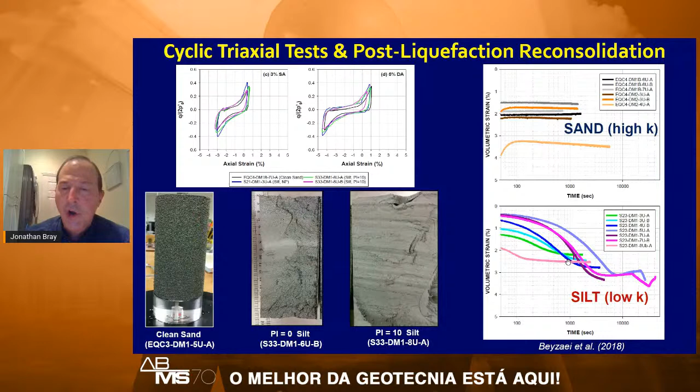What is often critical is beyond the stress strain response in the laboratory test, you look at the water and how water moves in the soil. Sands reconsolidate very quickly and the volumetric strain essentially appears instantaneously. Silts actually have a slower response, and you can also see the layering even at the element level.

So when you start thinking about post-liquefaction residual strength, I see that as a system property, such as the famous back analysis of the lower San Fernando Dam, where it is the layering, not just the element response, but also the movement of water and void redistribution that combine to lead to a back calculated post-liquefaction residual strength. It's my opinion that you should rely primarily on these back calculated post-liquefaction residual strengths based on field case histories, captured by things such as the cone penetration test, and consider the laboratory tests interpreted within the context of understanding their limitations and thinking about things such as layering effects that may change the element response to the system response.

One of the issues is post-severe strength loss like liquefaction: static slope stability analysis to understand, either seismically or statically, if the soil is likely to trigger liquefaction, and what are the consequences - the post-liquefaction static slope stability analysis.

Although advanced analysis should be performed, before you perform those advanced analyses, I think it is useful to gain insights from limit equilibrium analysis. They can provide valid insights, giving you a sense of the performance and a sense of the answer before you do the more sophisticated analysis. In some cases where things are fairly straightforward, they can be used as a screening analysis.

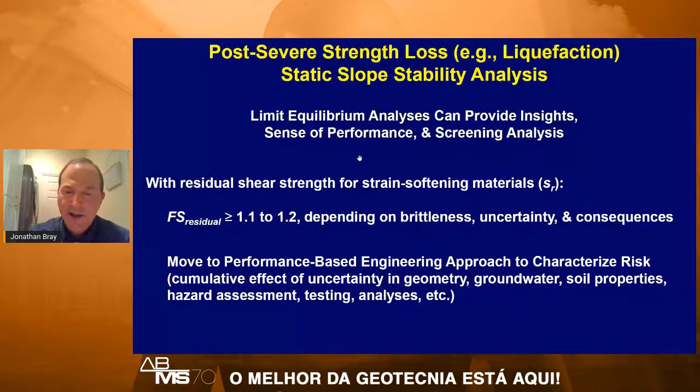Talking about pseudostatic slope stability analysis, it is not possible to capture the sophisticated, complex response of a system to a ground motion with a single parameter, a seismic coefficient. So one has to think about this as a calibrated approach that is just providing that initial insight. The seismic coefficient represents the seismic loading, the strengths are captured, and the factor of safety - we have to talk about all three of those together.

A selection of an acceptable combination of the seismic coefficient, the strengths, and the factor of safety has to be required through back analysis of field case histories to get consistent performance, or when those are lacking, consistency with more advanced analysis. The idea that a factor of safety of 1.1 is safe is not appropriate - it depends on the seismic coefficient, the strengths, and how the analysis is performed.

Given the importance of the seismic coefficient, it should be characterized carefully. It clearly depends on the earthquake shaking - the intensity, frequency content, and duration - and it depends on the dynamic response of the actual tailings storage facility. But it should also depend on how critical the structure is, and really that leads to what's the acceptable level of seismic performance, which we typically look at in terms of allowable displacement if we're going to have limited displacement.

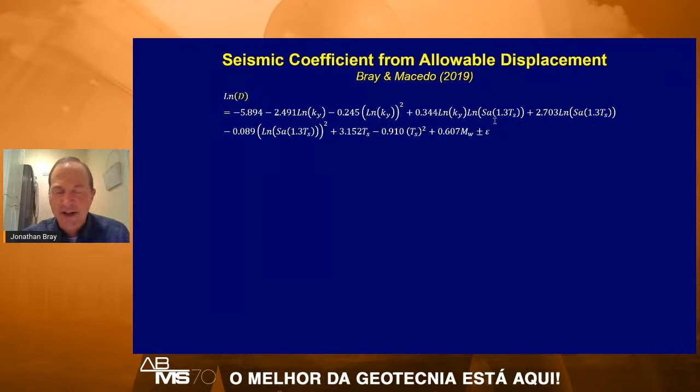The work I did with Jorge Macedo, building on the work with Thaleia Travasarou, developed a method for estimating seismic displacement as a function of things like the yield coefficient, the dynamic loading, the spectral acceleration at the degraded period of the system, and such. That can be inverted so you get a displacement-allowed, calibrated seismic coefficient that gives consistent performance with what you'd get from a seismic displacement analysis. It also includes seismic loading considerations and, importantly, uncertainty.

Let's look at an example: a seismic coefficient for a magnitude 7 earthquake. I'm calculating the seismic coefficient for different spectral accelerations based on the loading. If I pick a displacement of 15 centimeters, you can see as the loading increases, the seismic coefficient increases. Let's pick one ground motion level, a spectral acceleration of 1G at the degraded period of the site, for a system with a period of 0.3 seconds, magnitude 7.

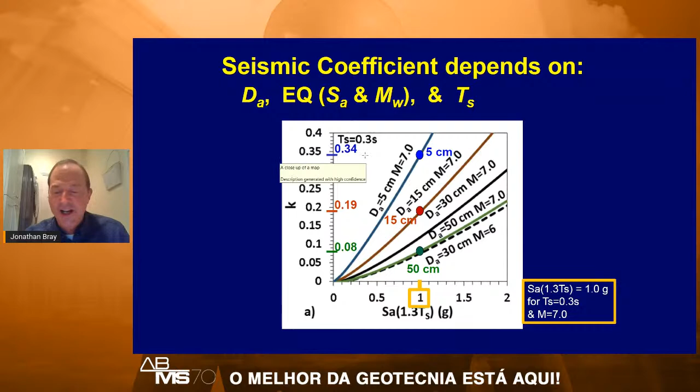Depending on what you consider allowable performance—whether it's 50 centimeters, 15 centimeters, or 5 centimeters in this example—you get a different seismic coefficient. So the seismic coefficient doesn't just depend on the intensity of ground shaking, the duration, or the magnitude; it depends on the allowable level of displacement. If it's 50 centimeters, the coefficient can be relatively low, like 0.08. If you have very stringent criteria like 5 centimeters, the seismic coefficient would be 0.34.

In conclusion, this method should only be used in non-flow cases. A static post-liquefaction factor of safety has to be greater than 1.0. You should use strain-compatible post-shaking strengths. The important thing is selecting an allowable level of shear displacement and capturing the uncertainty you want.

Capture the dynamic loading, then select that seismic coefficient—not arbitrarily, but based on the ground motion and, very importantly, the level of displacement you consider acceptable—and calculate a factor of safety greater than 1. That's essentially consistent with calculating the right displacement less than that value. Remember that Newmark analysis captures shear, so you have to add in the volumetric-induced displacement to get the total displacement.

Another approach, not much more complicated, is instead of using a calibrated seismic coefficient, to just use a seismic displacement analysis, or move toward performance-based probabilistic analysis, where you capture the uncertainty in the ground motion and the uncertainty in the dynamic response of the tailings storage facility. A paper such as Macedo et al. 2018 provides some insight on that. Thank you.

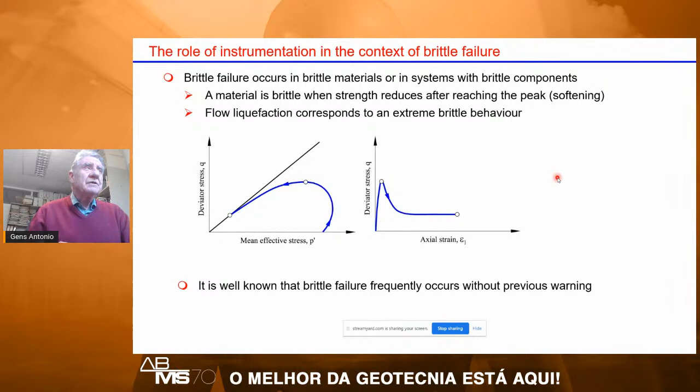In fact, there was liquefaction of the tailings behind it, but this liquefaction was after, as a consequence of the failure. It was important because it provided the extra thrust to move this dam something like 60 meters downstream, opening the breach and allowing the tailings to flow out.

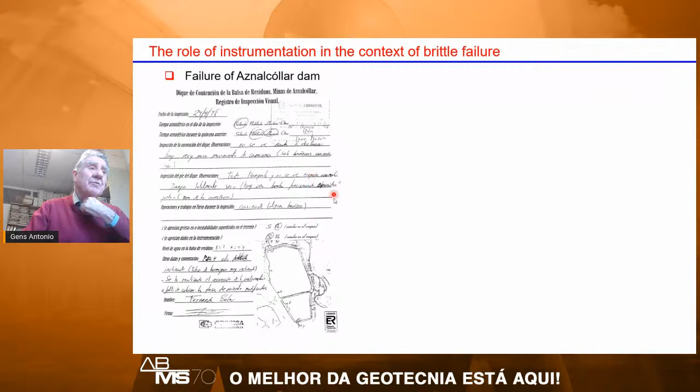This dam was actually closely watched. Every 2 weeks there was an inspection. Somebody went there and filled this form. If I translate it, it says nothing noticeable, all quiet, no cracks. The interesting thing is that the date was the day before the failure. In fact, a few hours before the failure, because it was in the afternoon and the failure took place at 3 in the morning. So no warning whatsoever.

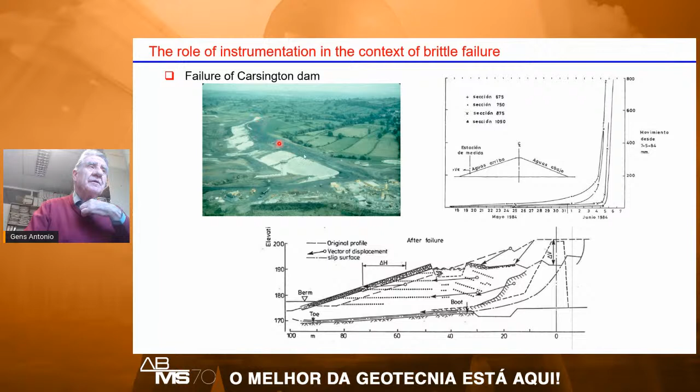The second case is a well-known case, Carsington Dam, a water dam which was near reaching end of construction. It fell about 600 meters long. It failed through the core and through the clay in the foundation, the yellow clay, and it was also instrumented. These are measurements of the horizontal displacements at the toe, and you can see there is a very sharp increase associated with the failure. There was very little warning, perhaps 24 hours, but it was a weekend, too late to do anything.

And in the case of flow liquefaction, which is a kind of ultimate brittle failure, we have the case of Brumadinho, where there was failure with no apparent precursors. I'm not going to talk about Brumadinho because later on Professor David Williams is going to go back to this case, but I wanted to bring this picture.

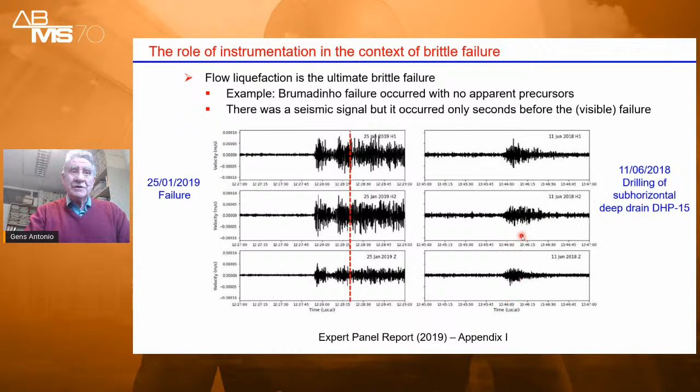I bring this here because 6 months before, there was a very similar event, very different from the blasting ones, associated with the drilling of a sub-horizontal deep drain. We have reasons to believe that this drilling actually set off a kind of contained liquefaction that didn't propagate to full failure. So having records like that, can it perhaps give an indication that you have a part of the dam which is very close to liquefaction? Obviously, if this is going to be associated to the failure, then it will not be of any use at all. So my opinion is that there is actually little chance of a monitoring system giving adequate warning of impending flow liquefaction failure, even if we resort to quite advanced technologies.

Instead, we should focus on trying to identify whether we have liquefiable materials in our system. For liquefiable materials, we need two conditions. The first is that the material should be saturated or close to saturation. Sometimes a figure of 85%, 90% is put as a threshold over which there is liquefaction, although the empirical basis for that is rather scarce. And also the material should be brittle - not all contractive materials are brittle, so we should try to identify when they are.

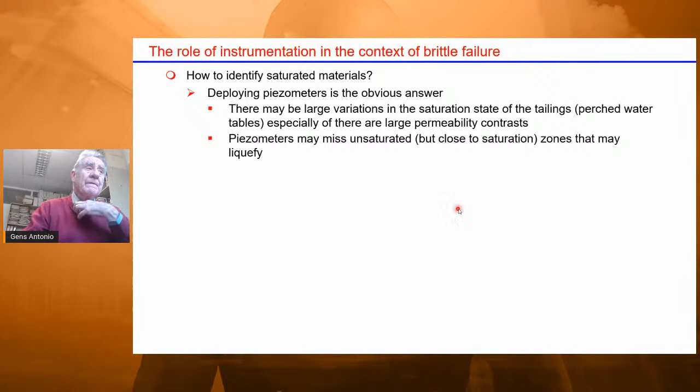How to identify saturated materials? Obviously, deploying piezometers is the obvious answer, but how many? Depending on the case, there may be big variations in the extent of saturated or close to saturated materials. Also, piezometers may miss these unsaturated but close to saturation zones that may liquefy. An alternative, not mentioned very much in the answers to the questionnaire, is the measurement of P wave velocity. Again, it's very sensitive, but only when it's very close to saturation, over 95% or so.

But it has proof that it can work. These are results from Jamiolkowski in that big Polish tailing dam that he and his co-worker have been working on for many years. You can see that it identifies the water table, even the perched water table, showing that there are some complexities in these distributions. But it's always difficult to know whether an intermediate value of P wave velocity corresponds to a liquefiable material or not.

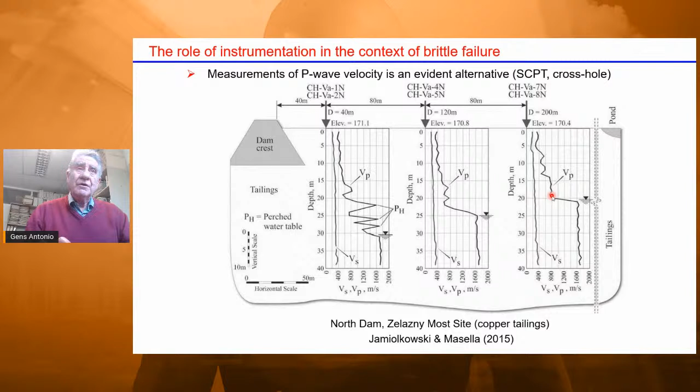And finally, the final point is how to identify brittle materials, and usually we resort to in-situ tests, and CPTU tests are the favorites. Vane also, but I tend to prefer CPTU tests, interpreted in a fundamental way through the state parameter, or more empirically using soil behavior chart types.

I just want to mention that in our group we are interested in this question, and we've been trying to model cone penetration in brittle materials to provide a better understanding and try to identify a signal related to brittleness, and ideally to the degree of brittleness. We use a model, as was mentioned by Professor Bray before, but this is a different one based on critical state and state parameters. We take into account that we deal with softening materials with large displacements, and basically we push a cone.

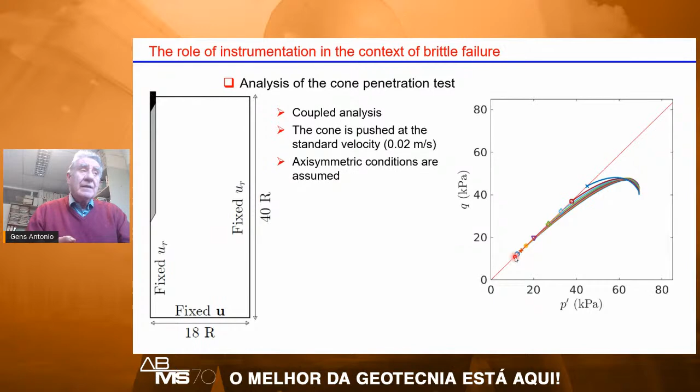With different materials, this one would be contractive but not really brittle, and the brittleness keeps increasing until getting to this one, which is very brittle indeed. These are some of the results one can obtain. Here you can see how the formulation refines the mesh following the advance of the cone. The pore pressures are more or less at steady state, and there is a reduction of stresses. Anyway, you can look at it and try to understand and get some results.

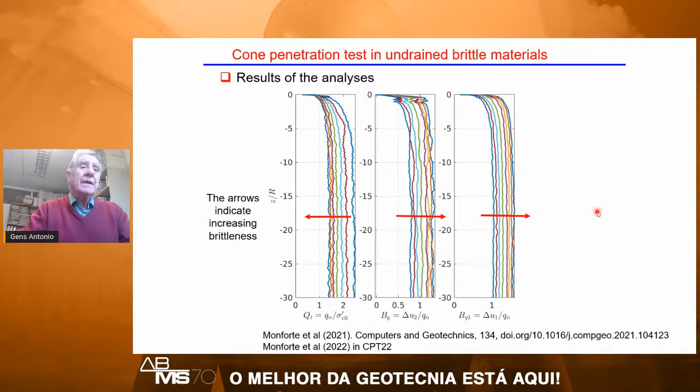And this is my final picture. For instance, these are the range of results we obtain with different brittleness levels. These are the usually normalized parameters of the cone. We see the reduction in cone resistance, the increase in the pore pressure coefficient, and so on. There are many results like that which we published last year, and we are going to present more at the CPT symposium this year in Italy. And I think my time is up. So thank you for your attention.

Thank you for your very interesting presentation, Professor Gens. For those of you who are not familiar with what motivated this seminar, this was prompted by answers given to a brief questionnaire on some of the main geotechnical issues related to the stability of tailings dams. A significant number of those responses showed serious divergences on key aspects related to the design, analysis, and monitoring of tailings dams, prompting the organization of this discussion session.

The first question of that questionnaire is: is it possible to design upstream tailings dams where their stability can be guaranteed on a long-term basis? If so, which are the basic requirements that an upstream tailings dam must meet? These questions will be discussed by the following two presenters.

The first one will be Dr. Ramon Verdugo, who got his master's and PhD from the University of Tokyo. He's currently the chair of the TC221 and founder of the geotechnical engineering consultant firm CMGI Limited. So Professor Verdugo, please, you can start with your presentation.

Thank you, Dr. Pastena. I'm trying to share the screen. Can you see my screen? There is no answer. How may I know that you can see my screen? Well, I will start.

The first question is whether it's really possible to trust upstream tailing dams. My response was that it's very difficult. Here is one example, Barahona, an upstream tailing dam that failed after, or during, the earthquake of 1928 of magnitude 8.4. You can see here the surface of the failure. Clearly, this was a very catastrophic failure.

After that, in Chile, we had another one in 1965, as another earthquake of magnitude 7.4 triggered the failure of the Cobre upstream tailing dam. And this is another example in Japan.

Mochikoshi upstream tailing dams, dike number 1, failed after 10 seconds of the main shake. Very interestingly, dike number 2 failed 1 day after the main shock at a quiet time without any tremor. They have some accelerometers and they are pretty sure that there was no tremor at the time of the failure of dike number 2.

The 2 previous tailing dams that I showed, Barahona and El Cobre, these 2 tailings failed after the earthquake. In one case, 2 minutes after; in the other case, some seconds after. So the earthquake's inertial forces are not really the forces that trigger or create the failure. Something happened that is triggered by the earthquake that finally ends up with the failure of the dam. This is another case, Brumadinho.

Now, the professor again says that some small tremor may cause the failure. You see here how an upstream dam is built: small dikes with competent material, but resting on the tailings, which can be absolutely loose or in a very contractive state. The first data showing static liquefaction was provided by Dr. Castro in 1969, and here you can see his results.

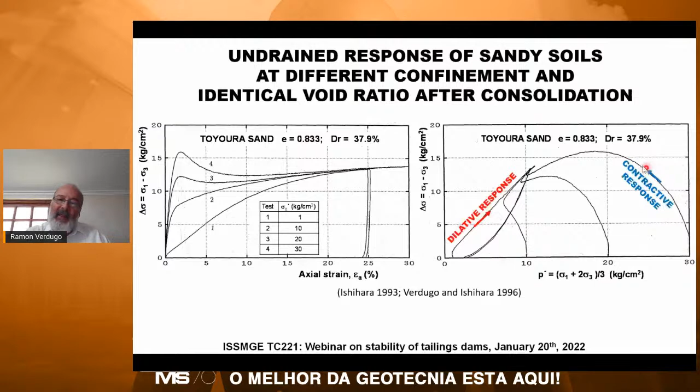Here are the results for this particular sand's steady state line. In the upper portion, you see contractive response of the material in undrained condition, and below you can clearly see a dilative response of the sample. So the steady state line divides the contractive state from the dilative state. Doing triaxial tests, simple shear tests, you can find this line and more or less define the ultimate strength.

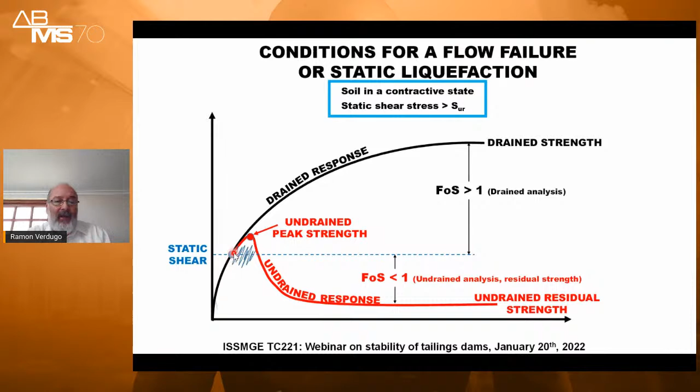But in a drained condition, if you use friction angle and cohesion for the analysis, you will have a very nice safety factor. So when you are looking at the drained condition, it's perfectly stable, but when you look at the undrained condition, you will have a collapse of the sample because the permanent shear stresses are greater than the strength of the material.

So my concluding remarks are: the empirical evidence indicates that the number of upstream dam failures significantly exceeds the failures of both downstream and centerline tailing dams. However, we have also had some failures in centerline dams, like Mount Polley, but in those cases it was because of problems in the foundation soil or because of overtopping.

Typically, the construction of tailing dams is part of the operation. Therefore, problems in the operation directly affect the result of the construction. So it's different than ordinary civil work, because operation is construction. To control operation is very complicated.

Yeah, it's much easier to be aware of what is going on during construction, but not during operation. Unfortunately, in upstream dams, there is no room for errors in the properties and behavior of the slimes that support the resting dikes of the dam. Commonly, the storage slimes are loose in such a way that they present a contractive response. Therefore, any disturbance that generates the undrained response of the slimes can trigger liquefaction and the consequent failure of the upstream tailing dam. Finally, it is possible to state that upstream tailing dams have an inherent susceptibility to failure.

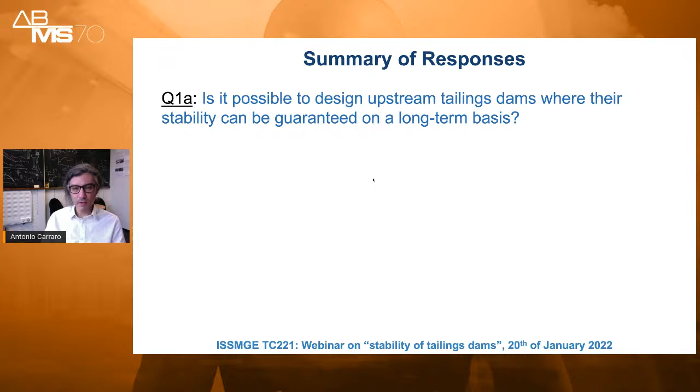If we actually break question number one into two sub-questions, we'll see that by looking at the responses from the survey, we have a generally optimistic response, perhaps, from the group of respondents, indicating that about two-thirds of that group suggest that it is possible to design upstream facilities in a way that their stability can actually be guaranteed on a long-term basis. However, if we actually look into the answers in a bit more detail, we're going to find out that there are quite a few follow-ups or caveats associated with those responses.

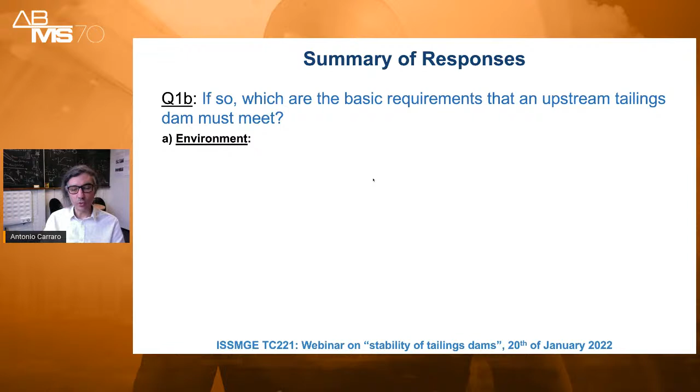So if we then move towards the second part of the question and inspect in a bit more detail what those requirements really are, then you can see that things become much more specific. If you try to break those requirements into groups, you find that many, or perhaps quite a few, of the answers suggest that those facilities are okay as long as we're looking at a particular set of conditions - for example, flat, desert-like, low seismicity regions. If we next pay much more attention in terms of design details, you'll see that there will be an important group of responses requiring rigorous and sound analysis to be associated with these types of facilities.

One respondent suggested a competent designer to be in charge. That sounds like fair game, as well as strict rules, best practice, and so on—all fundamental aspects of the design of these facilities.

There's one answer associated with the requirement for adequate foundation, which is probably a reasonable limit state, as long as we're also clearly identifying liquefaction as an alternative limit state.

Then we look into the more detailed aspects of operation and maintenance of those facilities, relating to design, control of deposition, and the details of the structural zone, which would suggest these are actually much more complex structures than we might otherwise think.

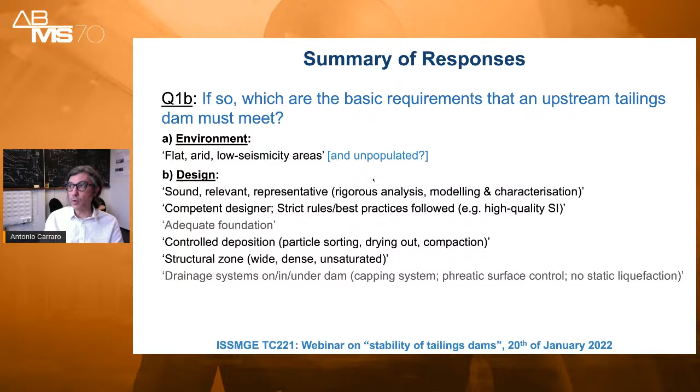One thing that showed up quite a few times was the issue of drainage. We're looking at facilities that need a comprehensive drainage system below, above, and inside, such that the phreatic surface, as well as liquefaction from a static standpoint, could be somewhat controlled.

Then, finally, the more general aspects of stability—if things go wrong, some kind of redundancy with additional structures to provide some kind of insurance policy associated with the design.

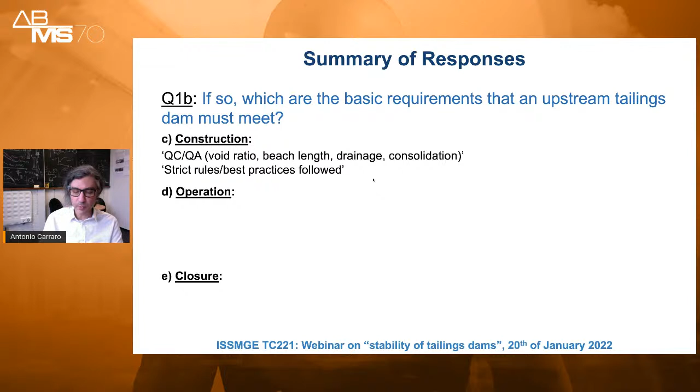Finally, moving into the other aspects related to construction, operation, and closure, construction and operation are really highly emphasized in terms of quality control. Quite a few answers focused on quality control and following rules and best practices. Operation being ideally associated with good governance and management, but also that observation of design requirements will have to prevail throughout the process.

There are also questions or answers associated with instrumentation and monitoring that will be addressed in question 3 later, so I'll leave that for the follow-up discussion.

To finish up these summary responses, one answer also pointed out the issue of a mandatory walk-away design—the idea that if you're going to walk away from the facility, there will have to be a stable set of conditions that prevail afterwards.

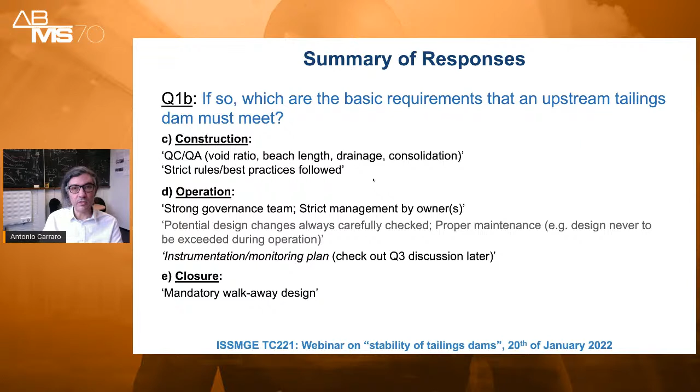Hopefully that provides a little bit of insight about the actual responses coming from the survey. The next bit I wanted to illustrate before my time is up today are questions associated with the more basic, fundamental aspects of these facilities.

From a more general standpoint, if we focus on the design and construction of upstream facilities such as these, normally we know they are constructed in stages. We eventually reach the capacity of the facility, and you end up with a structure that is a hybrid—some locations relatively well controlled, and other regions that may not be necessarily perfectly controlled.

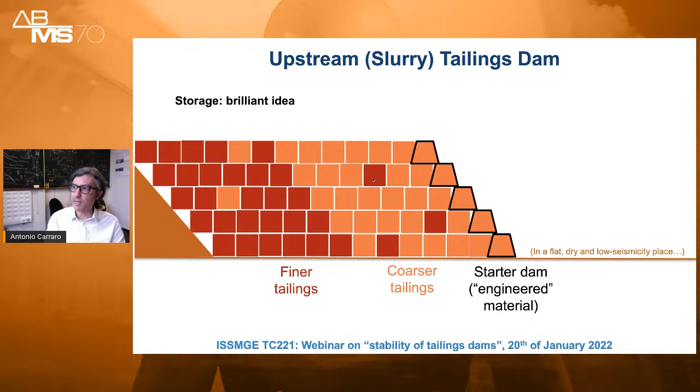From a storage standpoint, that's obviously a great design—we can definitely maximize storage within this setup. But then the question becomes: from a geotechnical design standpoint, is this really a sensible approach?

If we have an analogy in terms of similar things that are inherently unstable—for example, a balloon filled with a certain material, a well-defined liquid—and you start to play with that, as I did a few days ago, you'll find out sooner or later it's likely that the balloon is going to burst or no longer exist. That's exactly what happened to me, luckily, at a point where the balloon was already outside my office.

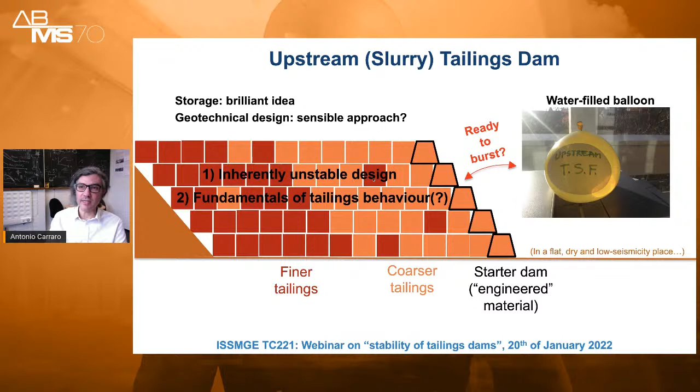Nevertheless, I believe we are looking at, in these types of approaches, a design that is inherently unstable just because of the geometry of the design. But then, to me, a more fundamental question relates to the actual behavior of the materials we're dealing with. In the case of the water-filled balloon, I do know I have a liquid inside. What can we actually say about tailings?

That triggers in my mind perhaps a different type of exercise, in which perhaps we need to look at the design process from a different perspective.

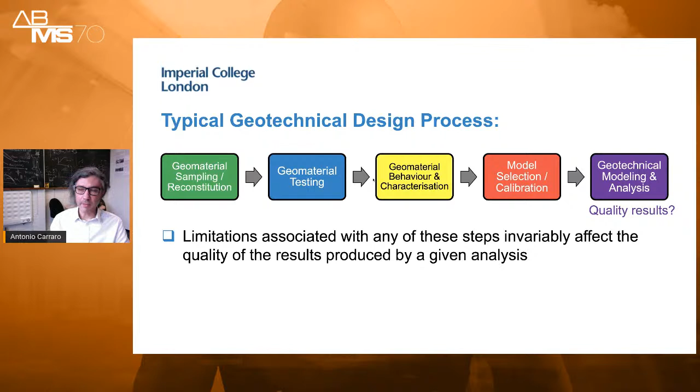If we look at a typical example of a design process, such as the one on the screen, it's very obvious that due to the nature of this in-series protocol, any limitations or issues associated with any one of the steps along the process will eventually, like it or not, have an impact on the final results.

So one question I think is important to highlight is whether we are aware of any particular issues that could be specifically associated with the construction or design of upstream slurry tailings facilities.

And then maybe a side question would be related to how much we as geotechnical engineers, not just the mining engineers, but we as geotechnical engineers are really aware of those issues and limitations. So those are the kind of things that I thought would be perhaps worth exploring a bit further.

So I'm going to essentially just point out 3 elements of specific parts of this process that I thought would be useful sharing. The first aspect could be associated with a very basic idea going back to fundamental soil mechanics.

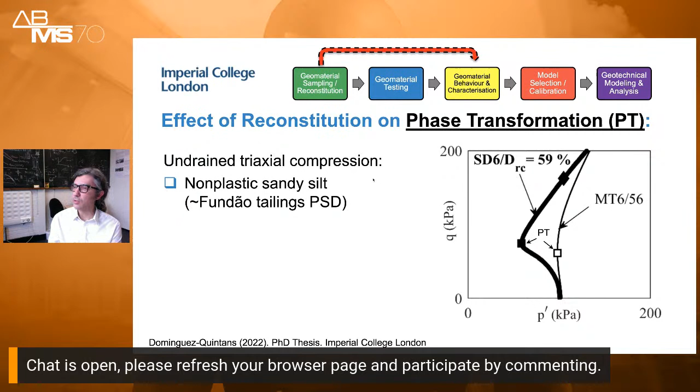If we are, for example, interested in the assessment of key states of the behavior of the material, let's say a phase transformation state, and we go back to a set of triaxial responses that we can control in a laboratory, then we would know that in theory, if our model is based on the idea that density and stress are the key state variables we need to be aware of, as long as we're able to control those 2 variables, we will have a response that will be systematic or relatively consistent.

A priori. But in reality, if you actually look into the way laboratory testing is carried out and normal practices, we do know since at least 4 or 5 decades ago that soil behavior, the behavior of geomaterials, is actually dependent on fabric, not just density. So if you repeat these experiments 10 times, 20 times, 100 times, you are going to find systematic differences between the responses that you're measuring, primarily because of the way or the process used associated with the sampling or reconstitution that we're actually using in those procedures.

A second aspect that I think is also directly related to the interpretation of the very classical laboratory response, which to me seems to be even more overlooked, is really related to stiffness. So if we go back to those same 2 conditions that we had before, look at states that are relatively similar in terms of density and stresses, then we're left with behavior that is inherently dependent upon the methods and the techniques that we're actually using or following in our laboratory or analysis procedures.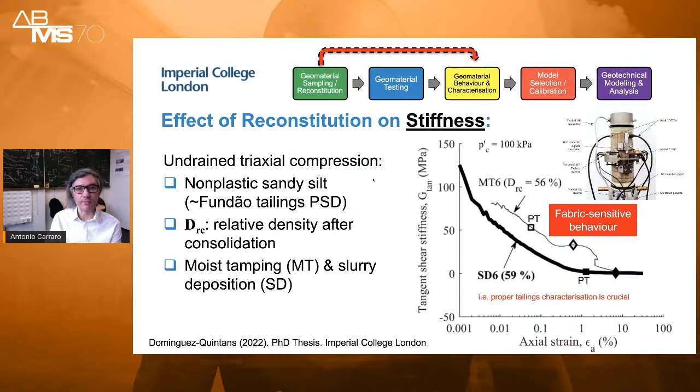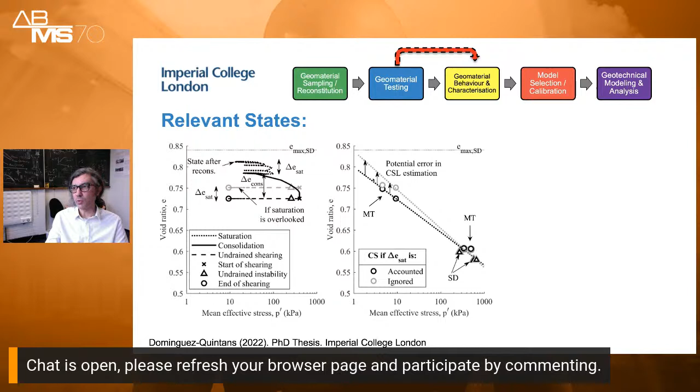Last but not least, I think one of the things that always comes back to my mind that we need to probably scrutinize a little further is the issue associated with the possible or perhaps relevant states that we're actually dealing with. So in a similar fashion to everything else we do in terms of mapping mechanical response, whatever we implement or use will have an impact on the outcomes of the things we're measuring. So if we're in the business of assessing states in a way that resembles the types of applications we're interested in, I think we need a much more in-depth conversation about how those states are actually being produced.

In this particular case, we're not just looking at specific details about the testing procedures itself, but also the expectations we have in terms of how we define those states. I think we need to think of this not only in terms of very specific scenarios involving density, but open up that kind of analysis for broader capabilities or possibilities that take into account fabric as well. So I think these 3 items, which are essentially very basic aspects of the fundamental behavior of geomaterials, could be things that in our process can lead to quite a few important outcomes in terms of the analysis we carry out at the end.

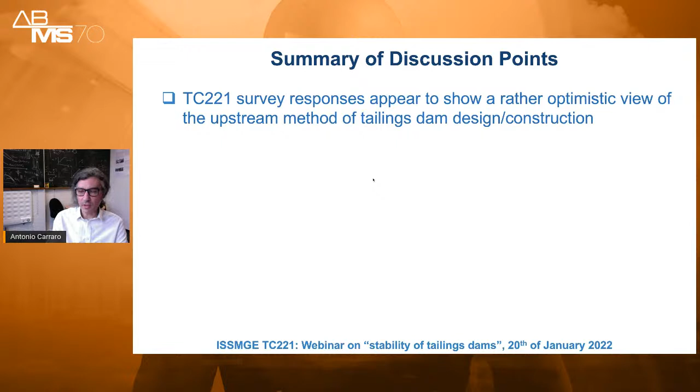So just as a summary, even though the responses from the survey appear to be a rather optimistic view of this type of design approach or method, upon further inspection you'll find out that there's actually quite a few requirements associated with those answers. So perhaps all those yeses may not be straightforward, positive, supporting answers, if you will, once we look into the details. The nature of this design is inherently tricky.

So you know already the way I personally think of upstream facilities.

But I think then the next question really is about what we can actually do in terms of raising the bar and increasing the level of understanding in such a way that we can move this design to a higher level in terms of understanding and articulating final answers for that.

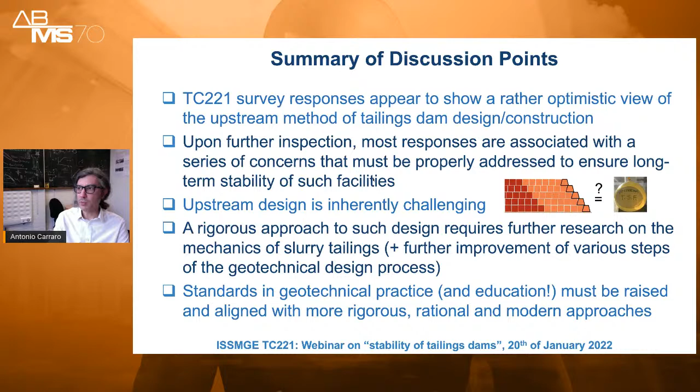Last but not least, in my opinion, not only the state of the practice needs to be improved, but also the education associated with fundamental geotechnical principles. Those two issues come together, they are inherently related, and I think we should be thinking much more seriously about how to raise the bar.

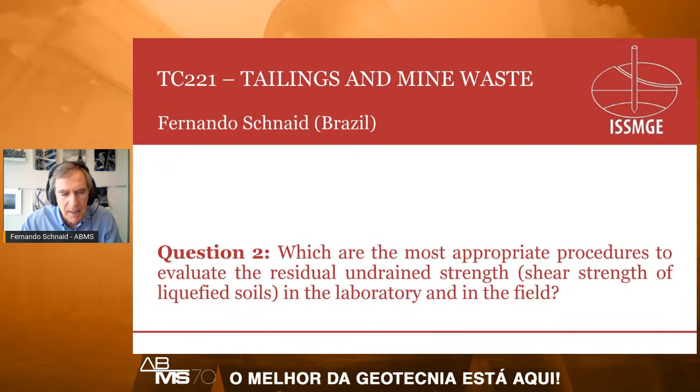We've seen in the previous presentation that everybody's mentioned this as residual shear strength, and it corresponds to the available post-peak strength determined from undrained monotonic or cyclic lab element tests. So in this sense, I think we are kind of safe as well, but there are drawbacks because we might have to approach this problem using undisturbed samples, as suggested by Professor Gray early on.

Then there's a third definition related to this liquefied shear strength. That's a bit more complicated because it refers to the shear resistance that a liquefied soil mobilizes in the field. That's why it's so complicated, because this is not replicated in lab element tests. That's one point, and that's not even within the field of soil mechanics—it's a combination between soil mechanics and soil rheology.

So here we are not on very safe grounds. That's one point, and I'll try to put that into perspective as you go along.

The second point is that we've seen in the presentations Professor Ramon in Chile talking about cyclic liquefaction, whereas others, like James, referred to Brumadinho, talking about flow liquefaction—the one triggered by monotonically increased shear load, whereas the other is triggered by cyclic loading.

Despite that, both phenomena are related to the development of very large strains, corresponding to the strain softening behavior of these materials, accompanied by excess pore pressure being generated under undrained conditions. So there are different approaches when looking at these two different phenomena.

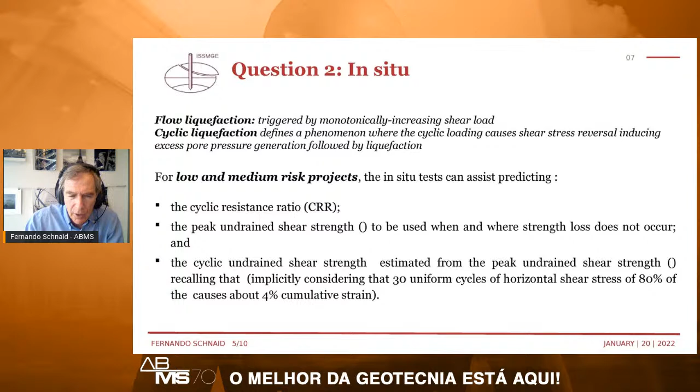There is, for instance, one research activity going on in Brazil now, developed within the major mining industry, in which undisturbed samples are being retrieved from reservoirs with materials showing high susceptibility to liquefaction. We are using the gel push sampler, the 6-inch stationary piston, the Osterberg, Laval, and even soil freezing techniques.

So it's very important to really understand to what extent the fabric is being preserved when retrieving these undisturbed samples, as pointed out in the previous presentation by Dr. Carraro. This is one of the points we have to bear in mind when dealing with these high-risk projects, which are essentially based on lab tests.

In some cases we are using reconstituted lab tests, and again there's the problem of how to select appropriate materials. There's always a need for a combination between in situ and lab tests—one for evaluating the spatial variability of a reservoir, and then selecting the appropriate materials for this type of analysis.

Now, as we move from high risk to low and medium risk projects, it's a different matter—then the in situ tests start to have some protagonism, if you like.

We've seen many of the answers placing more emphasis on in situ tests than on lab tests. This really has to do with the fact that we are dealing with low to medium risk projects. In this case, we can use in situ tests in a number of different ways.

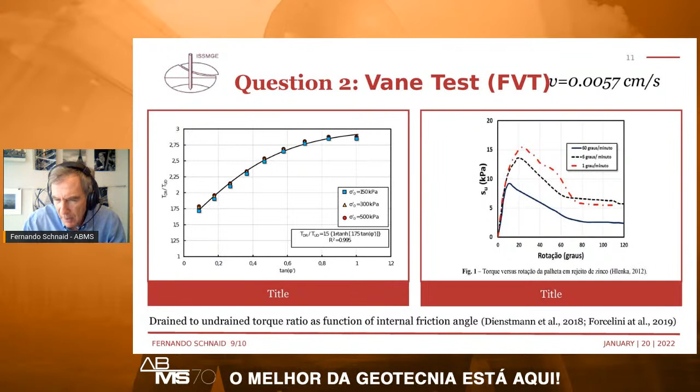The second option after the CPTU, to my surprise, was the field vane test, and I'll try later on to discuss that a little bit further.

Of course, the choice for the CPT, vane, or any other of these penetrometer or shear tests has to be made with due recognition for rate effects. This is generally done through a normalized velocity, a dimensionless parameter that can be expressed in different forms.

But recognition of rate effects is not straightforward, especially in the vane and certainly in the SPT. The SPT still has some use in different countries—you've seen answers from Japan saying they use it on a regular basis as a sideline from the main approach of more advanced analysis.

There was one answer on the full-flow penetrometer. Although this was a single answer, I'm going to give it some consideration, because I think it's a very promising technique, and we're using it in research these days in Brazil, along with geophysics in general.

So how can these methods be used? Going back to the actual definitions of undrained shear strength, we can rely, as I mentioned before, on critical state soil mechanics, which is fairly straightforward and well understood these days. Departing from these principles, there are a number of different ways of deriving the residual shear strength from the normalized cone resistance together with critical state soil parameters.

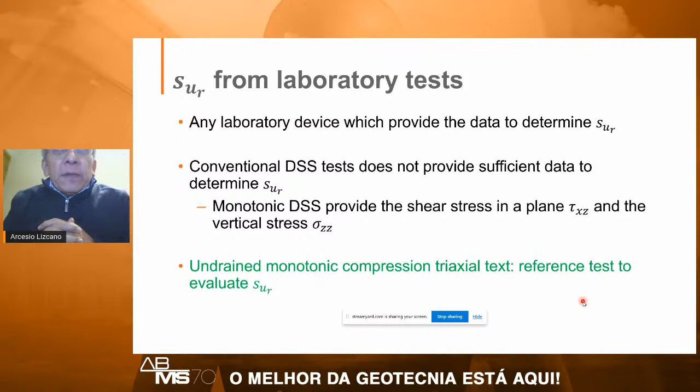Conventional direct simple shear devices... so undrained monotonic compression triaxial tests are now used for the limit equilibrium analysis, used as a reference test for the undrained shear strength of the tailings material. So monotonic triaxial compression tests are performed on disturbed, reconstituted samples in the lab because undisturbed samples are difficult to take here.

But if we need the Su at the critical state, it doesn't matter the initial fabric of the material. It doesn't matter if the sample is moist tamped or air pluviated, because this undrained response before the critical state is not considered to evaluate the Su at the critical state. So we can use reconstituted samples to evaluate the Su at the critical state, since the initial fabric evolves to the critical state and does not affect it.

We can look at the paper from Li and Dafalias 2012 when they introduced the anisotropic critical state theory. So what is the effect of layering, very thin layers, on the response at the critical state? That is one of the things that is still room to research. Here are some examples from Karlsruhe sand, where the results are from moist tamped and air pluviated samples. You see here on the right that the behavior before the critical state is different, but they achieve the same point at the critical state for this relative density. Here are the basic properties to estimate what is the void ratio.

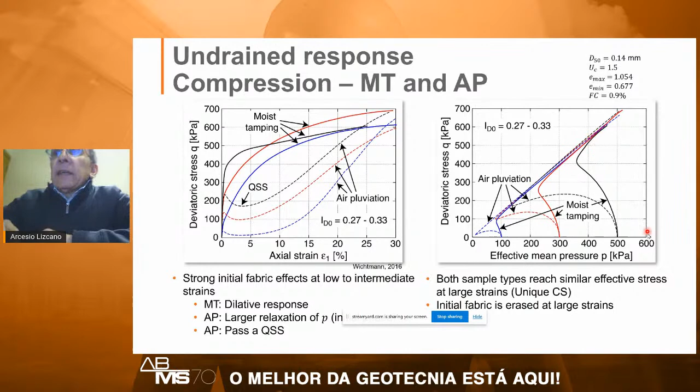Both sample types reach similar effective stress at large strain, so they are at the critical state. If we define SU as the strength at critical state, it doesn't matter what happened before. Here are samples with different relative densities—this is moist tamping—and they go to the same point or peak at full liquefaction, or will achieve this point at the end of the test. So fabric is important in the behavior before the critical state, but if you're using results at the critical state, it doesn't matter what happened before.

So if this is the line we need to estimate the SU value in the lab, you see all the results with different reconstitution methods—moist tamping or other—they go to the same critical state. So the SU value from the monotonic compression test is the reference test.

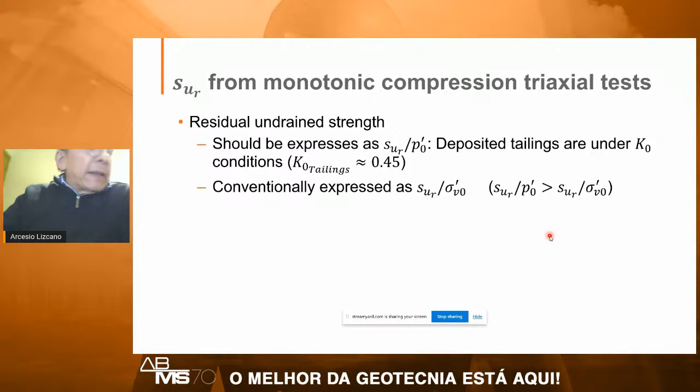The deposition of tailings in the site is anisotropic, or K-naught. What we have to do is represent the undrained shear strength in terms of the mean effective stress, but normally the reference value is normalized with the vertical effective stress. This is a well-known figure. For a triaxial test, you see the result you achieve—that's in the P-Q diagram, that's in the e-p diagram. You see the initial state here, and the undrained test goes to the critical state.

Here the state parameter is defined as the difference between the initial void ratio and the final, critical state value. That's the same here. If you combine these two figures, you come to this value, to this expression, and then you can express the SU over P-prime value as a function of the void ratio in the lab or in the field.

This expression is appropriate when the critical state line is a straight line with a constant slope. So people try to determine the state parameter from CPT, for example cavity expansion, to determine these values. But one of the problems is that what we obtain from this expression—for example with this value of lambda, K-naught, and M of 1.5, more or less for tailings, very angular material—the values we obtain for SU over P-prime are very optimistic.

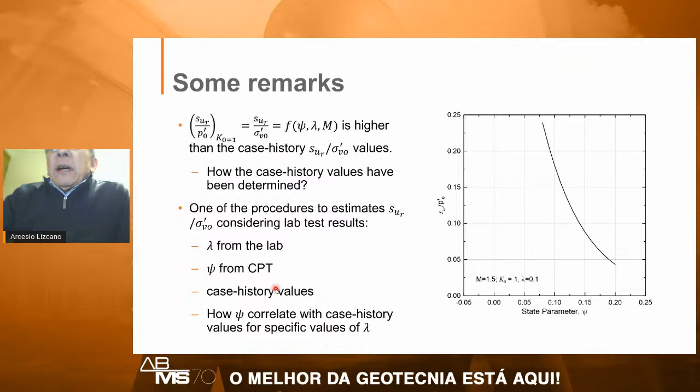Don't leave the task alone to in-situ tests like the CPT. Use laboratory tests and try to refer to case history. This case history value, for example in the procedure from Jefferies and Been, is related to the lambda and psi value—an approach we're using in several projects.

But one concluding remark is that the SUR value is very closely linked to limit equilibrium analysis. If we don't do limit equilibrium analysis, we don't need to determine this value. So one thing is to consider all these tests performed to determine the critical state line using the approach from Jefferies and Been, use this to calibrate and choose an appropriate constitutive model, and perform numerical analysis—in this case considering the stress paths in the analysis. That is my presentation. Thank you.

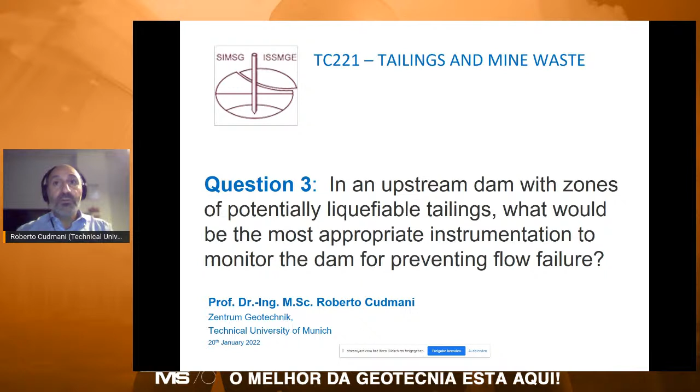I welcome you to the discussion of question 3: in an upstream dam with zones of potentially liquefiable tailings, what will be the most appropriate instrumentation to monitor the dam for preventing flow failure? Some participants felt uncomfortable with the word 'prevent,' noting that instrumentation or monitoring alone cannot prevent a failure. I think 'prevent' was used in the sense of forecast or warning. A more precise formulation could be: what instrumentation would best monitor the dam and warn of flow failure? I think people could feel more comfortable with this formulation. More generally, we could ask: does monitoring enable a reliable warning of flow failure? Because it's not only about choosing appropriate instrumentation, but whether monitoring can deliver an answer at all. In my short presentation, I will evaluate the answers.

I will show exemplary factual evidence supporting the position that precursors of flow failure can be identified by monitoring. However, tailing storage facilities are complex geotechnical structures with considerable heterogeneity and spatial variability of material composition and state, as we heard in the former presentation, and not fully understood material behavior and complex construction history, which affect the behavior. For this reason, interpretation of monitoring data, especially when different instruments and monitoring techniques are used or combined, poses a tremendous challenge even to experienced engineers. I will finish my presentation with a rough concept to overcome this challenge in the future.

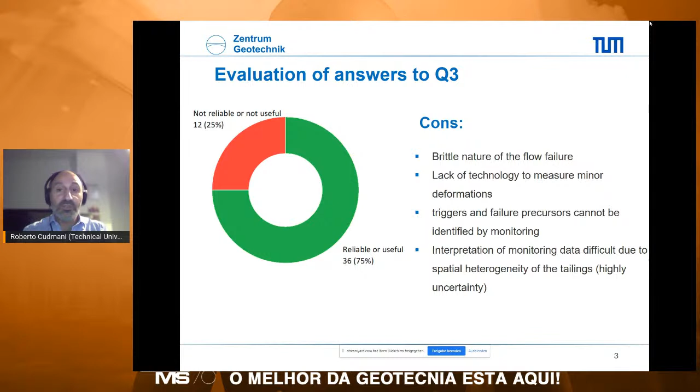We got 48 answers to question Q3. The opinion of 75% of the participants is that monitoring can help to forecast flow liquefaction, while 25% of the participants will not rely on monitoring to judge the risk of flow liquefaction.

Main arguments of the later group were the brittle nature of flow failure, the lack of technology to measure minor deformation, the inability of monitoring to identify triggers and failure precursors, and the difficulty to interpret monitoring data in complex geotechnical structures such as TSF.

From the geotechnical point of view, the argument appears to be reasonable, especially the argument regarding the brittle nature of the flow failure, as we heard in the last presentations.

The participants supporting the usefulness of monitoring to forecast flow liquefaction argued that flow liquefaction will be preceded by deformations and development of excess pore water pressure, and therefore evolution of those quantities can be used as an indicator of failure. They also state that monitoring will be useful only if the triggering mechanisms have been previously identified.

They find that flow liquefaction can be forecasted by combining different monitoring techniques and field tests. That forecast is only possible if automatic and continuous recording devices are used. And a few participants state that to assess flow failure, well-designed monitoring networks in combination with sophisticated data and predictive models are required.

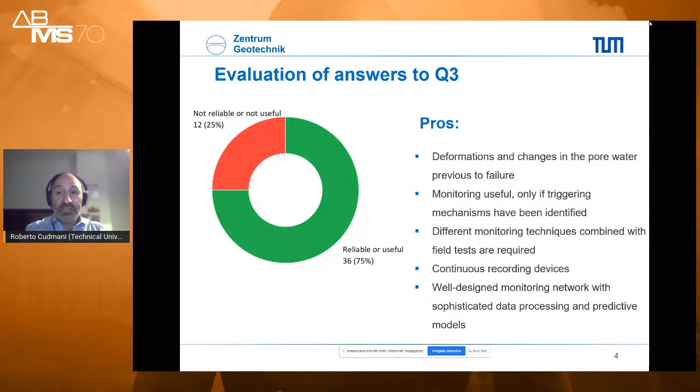Different monitoring techniques and instrumentation such as piezometers to continuously record phreatic level, water level changes and excess pore water pressure development; tiltmeter, inclinometer, extensometer to monitor deformations inside the dam; remote sensing and terrestrial survey to monitor global deformation of the impoundment and the slopes; accelerometers to monitor natural and induced seismicity; earth pressure devices to monitor total stresses; and geophysical methods, as well as geotechnical field tests to monitor changes of density, water content, and aging effects, were mentioned as required to monitor the dam behavior and to forecast flow liquefaction.

Therefore, in my opinion, most of the participants know or are aware of the monitoring techniques that are available nowadays.

Now, some factual evidence. First, one supporting that there is no possibility to capture or forecast flow liquefaction is the conclusion of the expert panel analyzing the failure of the Feijão Dam 1, also known, or better known, as Brumadinho. The conclusion was that none of the monitoring devices detected precursors to failure; rather, the dam's failure was sudden and abrupt.

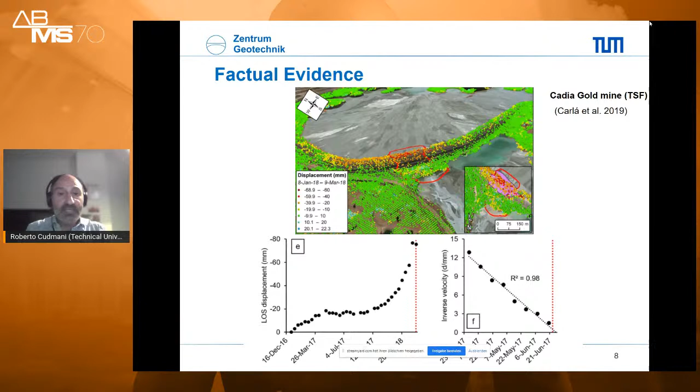The same method was applied by the authors to describe two kinds of rapid, sudden failures: one at an open pit mine that killed 16 people inside, and a very large landslide in China that killed 100 people, also a very sudden event.

This is, in my opinion, very interesting evidence that this kind of very sudden, very brittle failure can, in some way, be forecast by using aerial sensing.

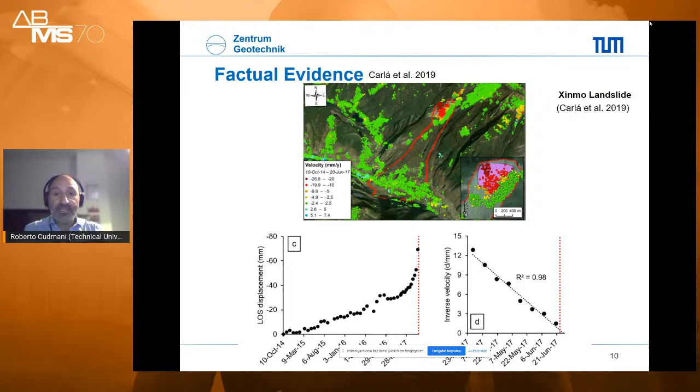So my concluding remark: different monitoring techniques and instrumentation are available and well known by participants in the questionnaire. Especially in remote sensing and terrestrial geodesy, huge progress has been made in the last decade, as I learned from colleagues here at the university, who are developing methods to track movement in the Alps near Munich using aerial and terrestrial geodetic methods.

I think we should take advantage of that. We know the US Army is able, using aerial methods, to hit objects with very large precision. I think we have technologies that we are not using to monitor our tailings, and they could be used. Several reports of past failures conclude that available monitoring data was not sufficient or useful to identify failure precursors.

We should look more closely at these reports. On the contrary, results of remote sensing data found in the literature provide some evidence of the initiation of a flow failure days and weeks before it actually occurred.

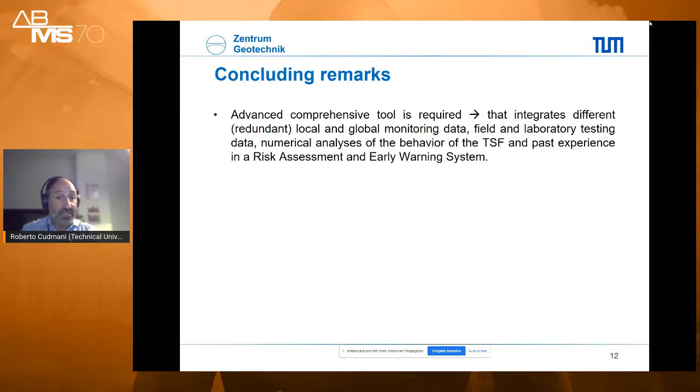We have thought about how such a system could look. Because of time constraints, I will not go into details.

I want to continue: several components of such a tool are available and were developed at different universities and research institutes around the world. Some have to be developed or adapted through interdisciplinary research with the participation of all stakeholders. It is important to get free access to real data—this is a sine qua non condition to develop and validate the required tools.

Due to its ability to learn and consider history, the earlier the application of the tool starts, the sooner it will be available, the lower the uncertainty of the assessment, and the higher its positive impact. In developing such a tool—and this is very important—geotechnical engineers, but not only geotechnical engineers, shall play a decisive role. Thank you for your attention.

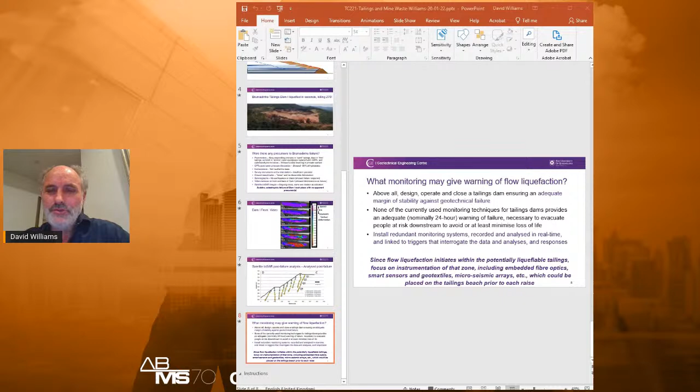I want to start with this quote: construction with or on liquefiable materials. I actually asked Idriss in 2020 what he would do about liquefiable tailings, given he's quite an expert in that field, and he simply said, I'd avoid them. You wouldn't build a water dam using liquefiable materials or on a liquefiable foundation.

Excuse me, Professor, we cannot see your PowerPoint in presentation mode. Is that any better? Not really. Well, I don't know what else to do. Can you please stop this sharing and start a new one? Stop sharing and start again. Yeah.

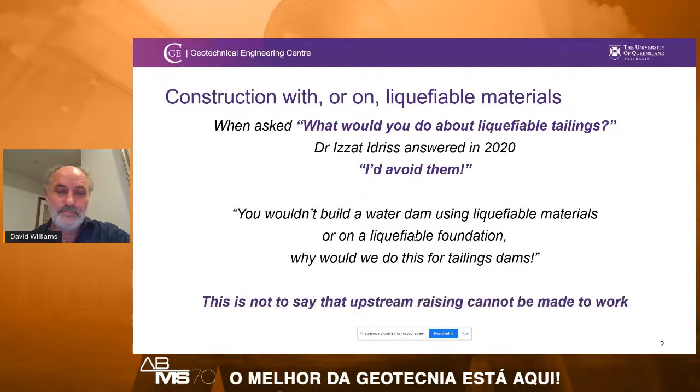It's not to say that upstream construction or upstream raising cannot be made to work. So let's think about upstream construction. It has limits, even in a dry climate—it'll eventually be founded on wet, soft tailings.

I've shown in the bottom of the screen a foundation. You've got a starter dam, we put in tailings behind it, and it's got a pond somewhere down the beach. We raise it by the upstream method, create another beach with another pond, and so on. We keep doing this.

Eventually you have an advancing edge of a pond at depth, and as you advance the downstream crest, or as you advance your upstream construction, inevitably at some stage that upstream construction—one of those lifts—is going to have at depth a form of pond, wet, soft tailings. So there is a finite limit.

When someone—I think it was one of the speakers—was talking about Australia, where we've got flat country, we can make upstream raising work. One of the reasons is that because of the lack of free storage, we don't have high dams.

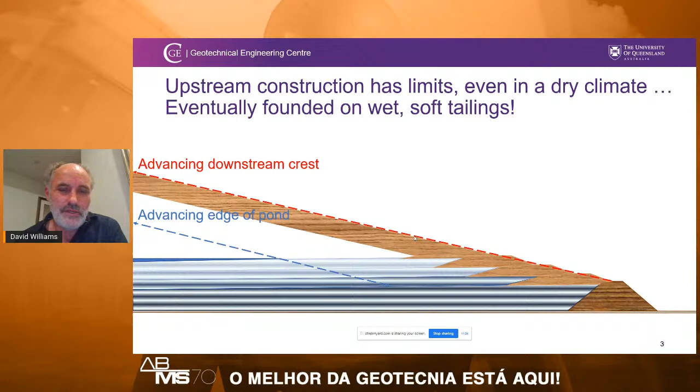So let's turn to Brumadinho. It's been mentioned a couple of times already. It failed in seconds and killed 270 people.

Were there any precursors to the Brumadinho failure? There were piezometers, but they're actually standpipes—open standpipes—and they're relatively slow to respond. You can calculate that in sand tailings you might get a response in minutes, trying to measure a 1 meter rise in the phreatic surface. It could take minutes in sand tailings to get that amount of water in an open standpipe. In fine tailings it might be days, but in slimes it might take a month.

So they're not instantaneous. In the case of Brumadinho, those open standpipes were being replaced by vibrating wire piezometers, but all they were doing was putting them down the open standpipes—they weren't necessarily grouting them. And they were looking to automate them, but they hadn't actually got to that stage.

Vibrating wire piezometers that rely on pressure changes will still be impacted by the rate at which water flows through the tailings, but they'll be quicker in responding compared with open standpipes because you don't have to fill a volume.

CPTU pore pressure dissipation showed that we were at about 50% of hydrostatic—it wasn't a hydrostatic water profile, it was about 50%. Inclinometers, unfortunately, weren't fixed at the base, so they were sort of floating, if you like, and didn't give an absolute measure of inclination.

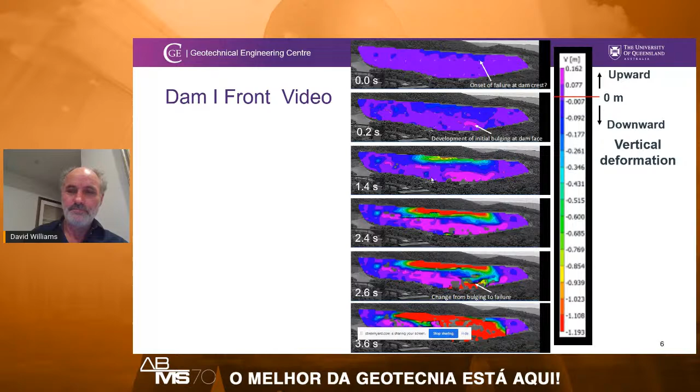So, what monitoring may give warning of flow liquefaction? The first point I'd make is that above all, you should design, operate and close a tailings dam ensuring an adequate margin of stability against geotechnical failure. It's the marginally stable dams that fail - not all dams fail, and many don't. It's the marginally stable ones that do.

None of the currently used monitoring techniques for tailings dams provides an adequate - that might be a nominal 24-hour - warning of failure necessary to evacuate people at risk downstream, to avoid or at least minimise the loss of life. There is a need, as has been brought up before, to install redundant monitoring systems, record and analyse in real time, and link them to triggers that interrogate the data and analyses and lead to emergency responses.

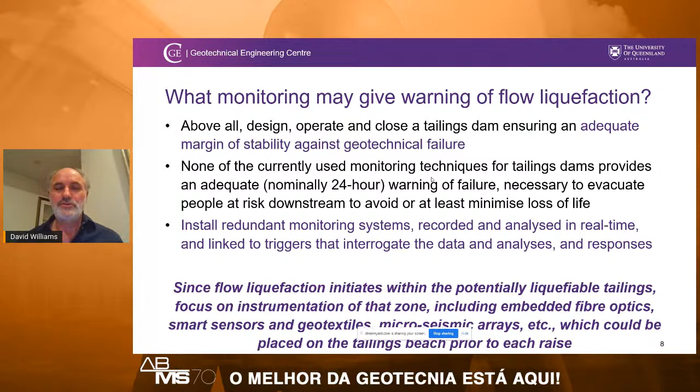Since flow liquefaction initiates within the potentially liquefiable tailings, focus on instrumentation of that zone. So don't just look at the face, don't rely on piezometers that might have a slow response. Look at new technologies including embedded fibre optics, which could be placed on the beach before you put in the upstream raise, smart sensors or smart geotextiles, maybe microseismic arrays, which could be placed in the tailings prior to each raise. And that's the end of my presentation.

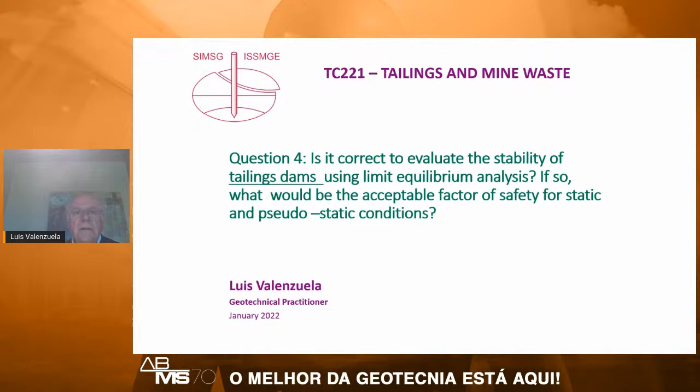Why is the limit equilibrium method so popular? Because it provides an indicator called factor of safety that is easy to communicate and understand. And I ask, do we really understand it? Because there are several implications in the way we understand what factor of safety really means. It's a relatively simple calculation, using a few conventional geotechnical parameters that engineers feel comfortable with. There are more than 60 years of experience and data that has been built up, which allows engineers to refer to past experience.

Safety limit equilibrium analysis is required by several regulators, is relatively simple to obtain, and is a method accepted by many regulators. It's a very useful tool as a pre-design or screening tool, but also in many cases as a design tool.

There are some drawbacks of limit equilibrium methods that should be mentioned. First, the method doesn't consider deformation, and deformation incompatibilities could be produced, especially if the soil mass analyzed is too heterogeneous, especially if you have a strain softening soil as part of the critical sliding surface. So you can get an acceptable factor of safety for sliding, but it could be associated with unacceptable deformation. So you have to go to a different method to complement the deformation analysis.

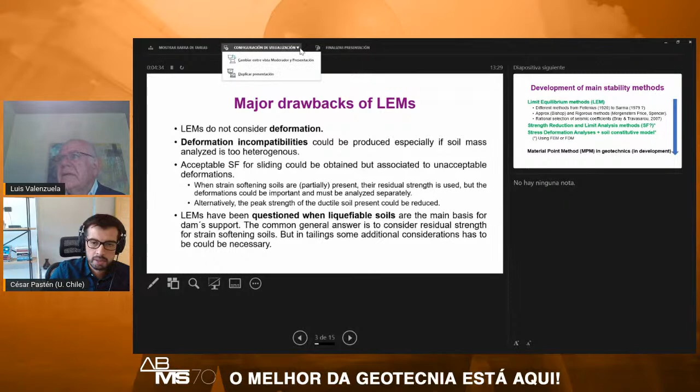Do you hear me? Yes. You are showing the presenter mode, you are not switched to presentation mode. You may change it. So nobody has seen my slides? Yeah, we have seen it, but the other view, if you like. Now it's correct. Yeah, you can go on. Thank you.

Okay, I was just mentioning the drawbacks of limit equilibrium method. Limit equilibrium method has been questioned when liquefiable soils are the main basis for dam support. The common general answer has been to consider residual strength for strain softening soil, and there has been a lot of discussion on the different difficulties about this and the different methods you can use. But some additional consideration could be necessary to do.

I mean, not just to take residual strength. The variability of the tailings material has been discussed by other presenters. It's a major problem as well.

I have to go quick. Oh, sure. Sorry Cesar, I cannot change the slides if I put it in presentation mode. I don't know why.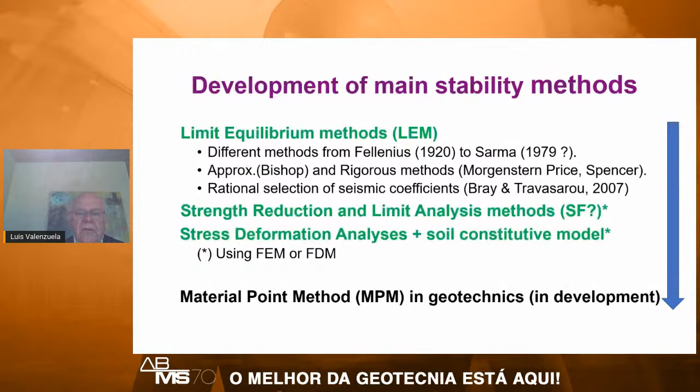What does a factor of safety bigger than 1 mean? Does it mean the dam is safe? First, we have to say limit equilibrium method considers only one specific failure mode: sliding. So you cannot say that because you have a factor of safety bigger than 1, your dam is safe.

The other thing is the stability margin, which is the difference between the safety factor and 1, is expected to cover calculation and property uncertainty, plus a certain clearance to assure a low probability of failure. But probability of failure is not provided by the method.

Reliability index can be calculated with the limit equilibrium method. So in order to compensate or consider the variation in the parameters, some relations have been proposed in order to link the reliability index calculated based on limit equilibrium with a probability of failure.

This will be shown on the next slide, but we should remember that probability of failure also depends on the design and construction quality, as we will show on another slide. In critical cases, probability of failure replaces the factor of safety as an indicator of acceptable stability, for instance in cases of high failure consequence.

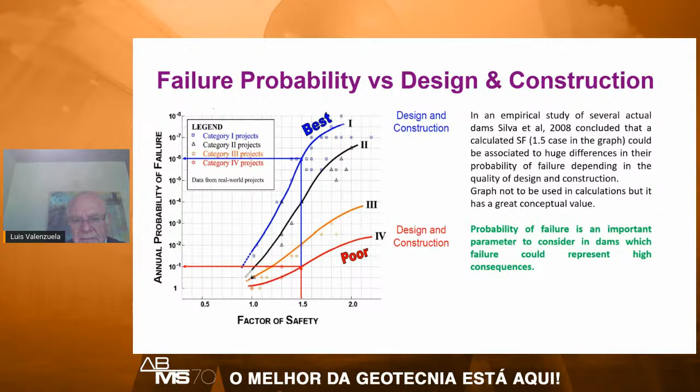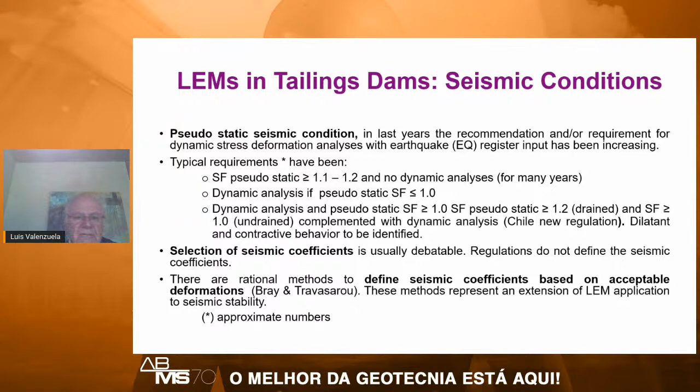This is the case of upstream tailings dams. The first clarification I want to make is that upstream tailings dams could have different geotechnical and engineering characteristics, but still use the upstream construction method. So there has been confusion in discussions and even among regulators and laws when, for instance, some countries have banned the construction of upstream tailings dams because they were thinking of a simple upstream tailings dam like the one used in the old Chilean upstream dam that had the tremendous disaster of El Cobre in 1965.

With more than 250 casualties, and also the Brazilian Brumadinho disaster, which are characterized by relatively steep slopes, high rate of raising, no tailings segregation, and potential liquefied tailings.

Limit equilibrium method probably could be used for analysis of existing dams as a first step, and also for screening purposes when considering the possibility. But there are difficulties in defining soil characteristics due to construction and operation variability, which has already been discussed — stress deformation analysis with an adequate constitutive soil model will probably be necessary in order to advance the study.

My personal opinion, which coincides with several opinions given in the first section, is that there are low chances this type of dam would be acceptable, due to the difficulties in soil characterization, high dependency on operation procedures, difficulties with monitoring that would allow required time for emergency response, and questionable walk-away closure. I think a walk-away closure is almost impossible.

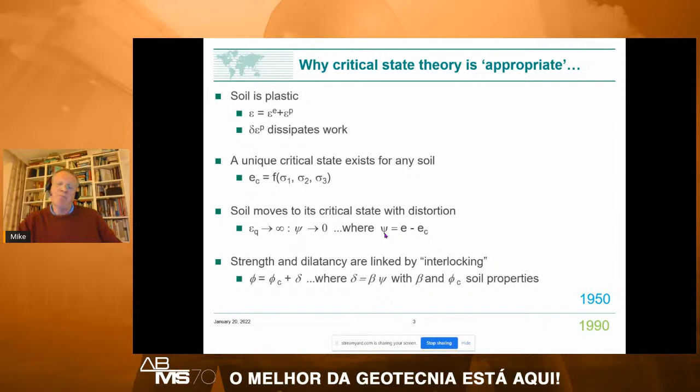So why is it appropriate? Well, it's appropriate because this framework is usually called critical state theory. It's the only framework with a physical basis for how void ratio controls soil behavior using consistent physics and mathematics. There's nothing else out there. Now, it may be in 20 years' time something will come to pass, but right now, this is the only game in town. If we're going to understand these, and if we accept that void ratio matters, then this is the only game in town.

So that's the framework, but there are a range of models within the framework. The framework is universal. It is a set of ideas and a set of observations, but we then want to make it mathematically tractable.

Various groups have done this. I've thrown up on the right-hand side here, if you go to a current software package, and this stuff all has to be implemented in software, so it's unusual for it not to be available in software. You find bounding surface implementation, which is Yannis Dafalias and co-authors, and there are various versions of this. NorSand, which is a generalization of the Cambridge ideas. And then we also have the clay and sand model, which is the Barcelona folks, kind of like.

The linking feature of all of these is they use the state parameter. So they're all critical state models, they've all got a critical state, and they've all got the state parameter. The properties they use are common, but they're named differently in the various models. So that's something perhaps we could think about cleaning up.

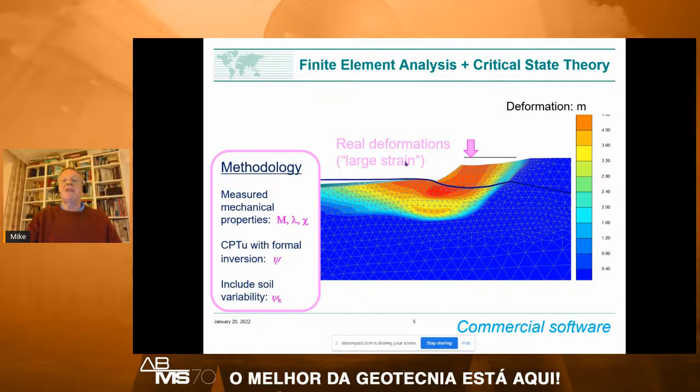And what we're going to do is we'll watch the construction go ahead, and everything is drained. There are, just like Brumadinho, zero excess pore pressures until the last lift. And we put the last 500 millimeters on rapidly, and we then see what happens. And what I want you to do when you see the simulations, look at the toe of the slope and then watch what happens. So here we go.

It works. We're building the thing now. Last lift gone, and we just failed at the toe, and we're now propagating outwards. Notice how the crest is settling. And isn't that just beautiful? And doesn't that look like Brumadinho? Now, the theoretical rate at which you saw that propagation go outwards is 50 meters a second or thereabouts.

That is exactly what you see at Brumadinho. And you'll notice a settlement here - you can see it there. This you're looking at was the first run of this particular case history, and 4 meters of settlement was computed. The actual is 5. We need to tweak a couple of things, but this was a validation. We wanted to see if we use things at face value, just how well it would work. And the answer is here.

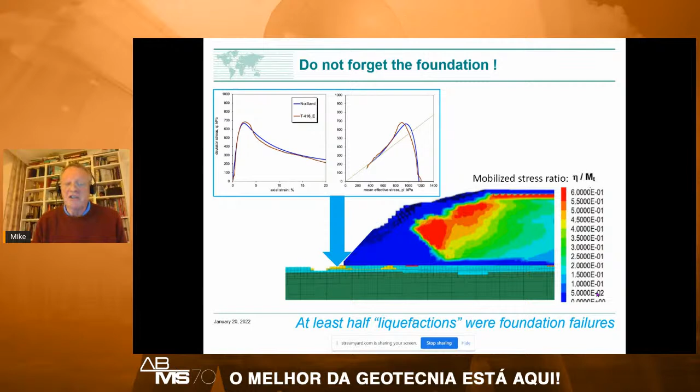It's beautiful. And the key thing here is, other speakers have mentioned foundations, but in terms of actuarial numbers, half our so-called liquefaction case histories are actually foundation failures. And you've got to deal with strain softening in the foundation and think about its consequences.

So to quickly come now to an advocacy of why I believe this approach is the future for our profession, I'm going to break it into what's good and bad about finite elements. What's good is it's actually quite simple. We're using all data at face value, and it's consistent mechanics. There's no K sigmas, K alphas, or other things.

There's no fines content corrections. You do everything much the same as you would do, for example, in hydraulic engineering. It's all proper mechanics. And it gets all the details correct. We get strain softening. We get the magical drained to undrained transition - we don't have to invent it, it's actually part of the mechanics. And we explicitly honor void ratio.

And we have a track record of forensics of large dam failures. When something bad happens, there's always a search for the guilty. The search for the guilty in the last 20 years has pretty much always required finite element analysis. So that's the good part about finite elements and critical state theory.

What's bad? Well, the previous speaker, Luis, was referring to all the experience we have with factor of safety. We have not built a similar body of experience or understanding around finite element analysis. We've applied it to dams that have fallen down - well, there's no argument what the factor of safety was, they fell down. But when we start applying this methodology to a proposed raise or trying to assess the stability of an existing dam, we've got to get our heads around how we're going to represent safety and how we're going to communicate our assessment of that safety to the mine owners and to the regulators and to the general public.

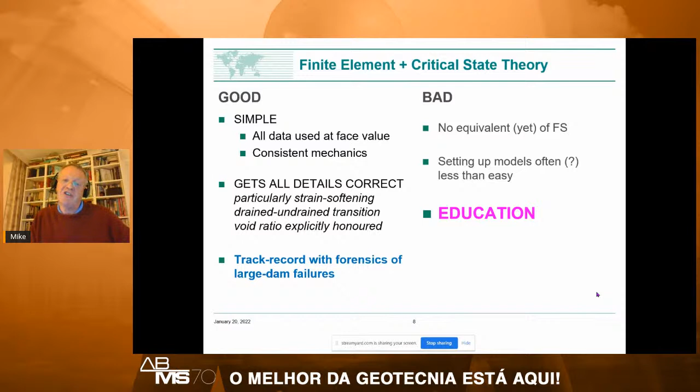The problem really comes down to education. The suggestion, I think, from Antonio was perhaps practitioners need to get smarter. Well, my response is this: we're in this mess because of the universities.

This book, I'm sure you'll recognize the title, and you'd recognize the photo of the two criminals who produced it. The preface of this book—I've taken a couple of words out so I can get it on the screen—says research in soil mechanics diverted attention from the manifold limitation imposed by nature on the application of mathematics to earthwork engineering. That is, soil is some magical material that is somehow immune, or applied mechanics doesn't apply to it.

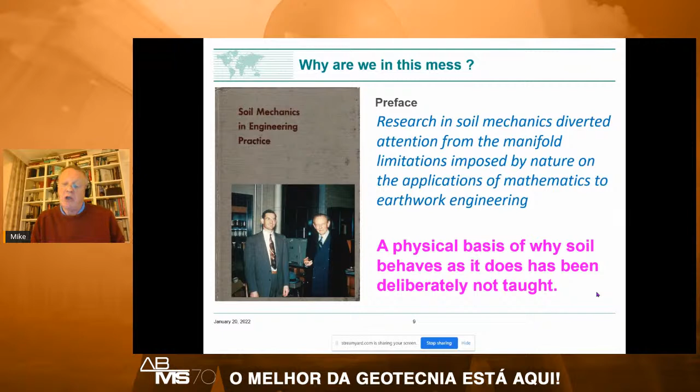Mathematics cannot work with it. Well, to me, this is an appalling statement. The problem is that this book has influenced most university teaching and most university curricula. The consequence of this total, utter abrogation of mathematics is that the physical basis of why soil behaves as it does has deliberately not been taught. That is why us practitioners haven't had, or are perhaps struggling with, some of these ideas. It's because we are dealing with a complete, utter failure in geotechnical education.

So, to quickly wrap up, Mike's answer to question 5 is yes, we do need this method of analysis, and I believe it has to be used more widely. It's not just in terms of finite element analysis, which is implicit in the question, but understanding that a theory of why soil behaves as it does—you can use that to look at a triaxial soil test and say, does this test make sense? What is the test telling me?

Having an understanding of soil behavior, to me, has to become a core competence for all involved in tailings engineering, as it's now called. And I say the corollary is that the real question 5 should have been: how do we fix geotechnical education? At that point, I'll now put on my bulletproof vest and over to questions.

Thank you, Mike, for sharing that very important message at the end of your presentation. Very important for all of us who work both in academia and in practice. So who's going to shoot me first?